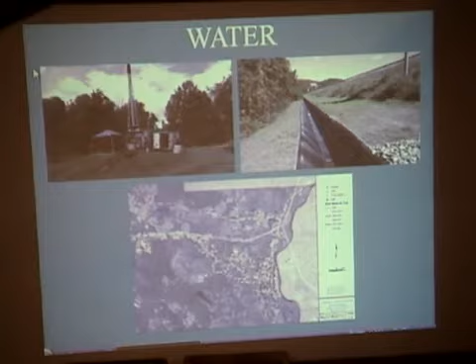Give you a background on Foster Street - everyone knows where Foster Street is. Right behind the Common Man, we have our well field. We have two gravel-packed wells at that location. One well is housed in the building in the top picture, and that's our primary well - it's been our workhorse for many years, the one we primarily use. Well number 2 is also a gravel-packed well out in the field area, represented by that hatch cover in the second picture.

That's the well currently getting reconditioned at this time, and we're also updating it to provide a more sanitary seal around it. The existing configuration was a shaft and turbine pump and motor that was not waterproof and flooded once before. So in this new configuration, we're going with a submersible pump and submersible motor - almost like just a normal homeowner's well with a pitless adapter coming out. It'll be totally sealed off from the elements, so we're hoping to get that up and running soon and back online.

We have a backup generator at this location that currently powers both wells in case of an emergency. It automatically comes on with a switch gear and can power those and take us through power outages.

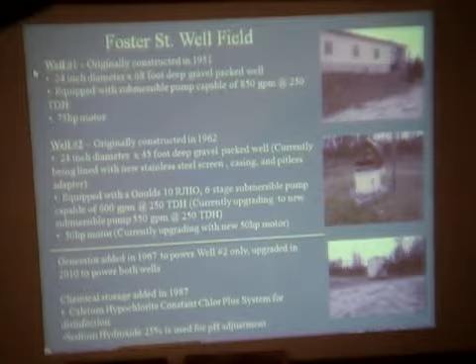We also have chemical storage on this site. We treat our water with calcium hypochlorite, which is used as a disinfectant for any coliform bacteria that may be present. We also use a sodium hydroxide solution for pH adjustment and corrosion control. Many of our pipes are iron - ductile iron, cast iron - and that's used to inhibit additional rust and dirty water and things of that nature that can result from water flowing through those type of pipes.

Next building is Reservoir Road Booster Pump Station, located up on Reservoir Road. You can't see this building from the road - you'll see the old booster pump station, which is a brick structure along the road, and this is out back a little ways down our access road. This was built in 2006, fairly new. It takes - so pretty much the two wells pump water throughout the distribution system and up to this location.

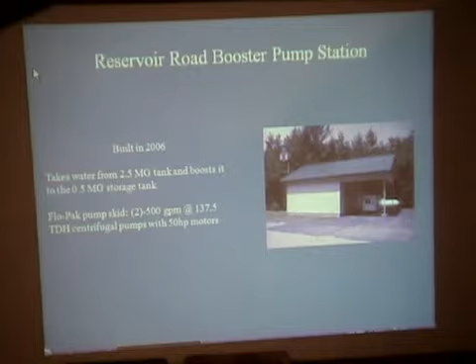And when the 2.5 million gallon tank, which you'll see coming up next, meets its demand, and the 500,000 gallon tank calls for demand, this booster station transfers water from tank to tank. So it boosts it up to the 500,000 gallon tank, which is a little farther up the road, and provides our high pressure system. So that's this building here.

This is our Boulder Point Drive booster station. You'll see it on Boulder Point Drive heading up towards Walmart on the right-hand side. This booster station draws water from our low pressure zone and boosts it only for the shopping centers and Walmart. This was needed back in 2002 when the development was being built there, to provide adequate pressure to those buildings and facilities. It also has one fire pump for those facilities, and that's an on-demand type pump.

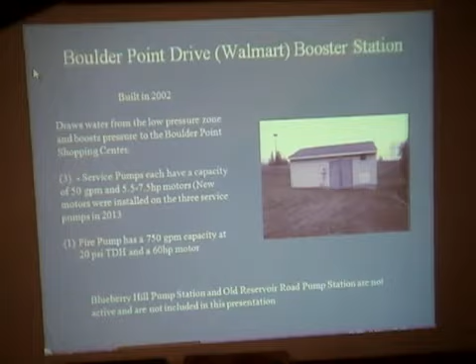I also noted we have 2 additional booster pump stations: one at Blueberry Hill condominium complex, and one at the old Reservoir Road booster pump station, and they're not active at this time. Old Reservoir Road pump station has been dismantled and is currently in disrepair, and it was not needed because of the new one that was built. The Blueberry Hill pump station was never put online because it was built for future expansion at that location. So at this time, that one's not active either.

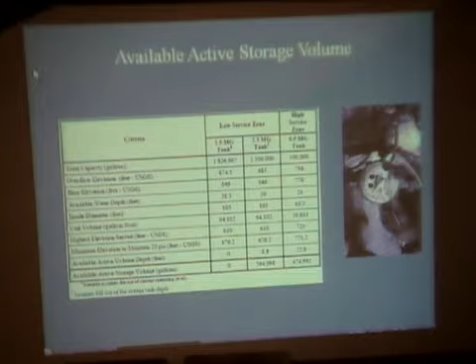Here's our available active storage volume. Most of this information you'll find in our water system master plan that was put out in 2014, which we provided to Sharon, and I don't know if anyone had seen that prior to this presentation. A lot of this information is found in there as well.

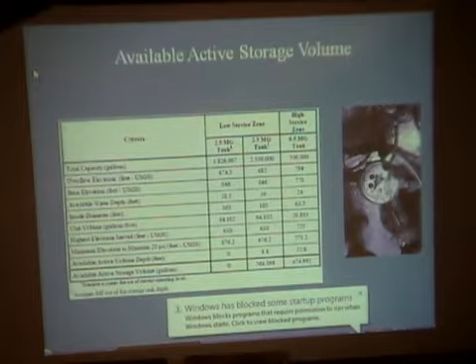You'll see our low service zone is supplied by the 2.5 million gallon tank, and our high service zone is supplied by our 500,000 gallon tank. You can see the capacities there, the elevations, and minimum elevations to 20 psi, which is required for fire flow, and our active storage.

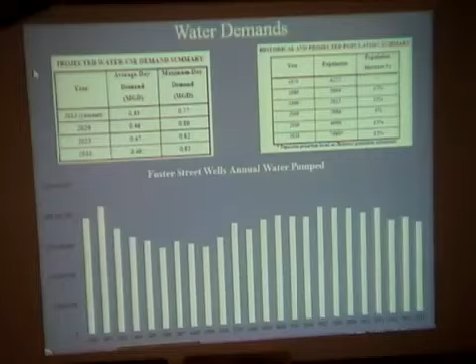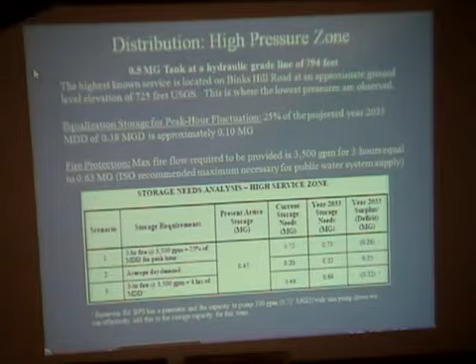Jason, there were a couple spots where you had the smallest diameter pipe - is there, and you said at some point that would have to be upgraded? Correct. Yep, we're assessing that currently, and it'll be in our future capital improvements plan. When do you anticipate, if we can handle up to 2033? Is there a way to tell when that might need to be done? Yeah, we're currently prioritizing that.

Those projections on flow are total projections, total demand throughout the entire system, what our wells pump - not specifically through those smaller diameter pipes. We'd have to do further flow assessments and monitoring on those to determine how much flow is going through each section of pipe. We don't have the metering capabilities right now to provide that data, but we can get an overall idea by isolating the roads or sections of pipe and taking readings from customers' meters along those stretches, adding that together to find the total flow and demand within those areas. That's something up and coming; we haven't done that at this time.

The 4-inch and below is a fire protection requirement, so they're requiring minimum 6-inch diameter pipe. This stuff was put in probably 10, 20, 30, 40 years ago, at a time when there was no requirement for that.

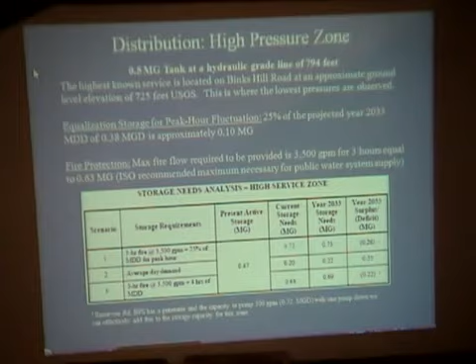Looking at the high pressure zone, this is the 500,000 gallon tank. We have a hydraulic grade line of 794 feet, with approximate ground elevation of 725. These are projections based on that 2033 year for storage needs, whether we're going to have a surplus or a deficit at that time.

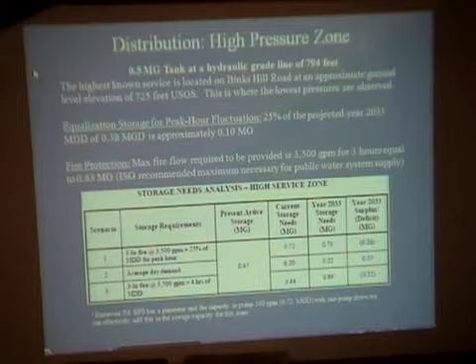Fire protection is taken into account in this table, and the maximum fire flow required is 3,500 gallons per minute for 3 hours, equal to 0.63 million gallons, which is an ISO recommended maximum for a public water system - independent insurance companies require that number.

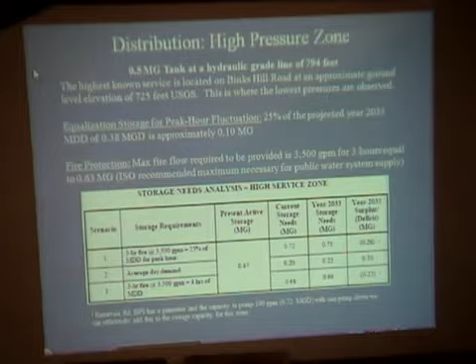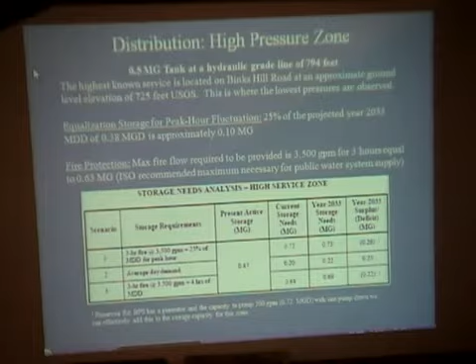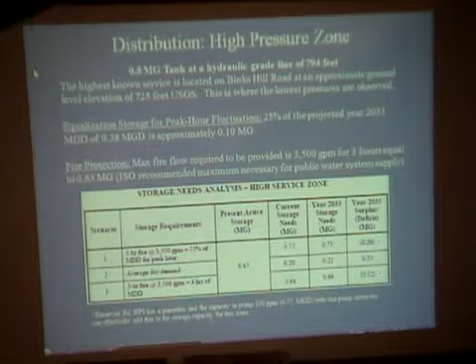We take the calculation of 25% of our maximum daily demand for peak hour and include that in scenario number 1. It shows our present active storage is 0.47 million gallons, and our current storage needs are 0.72, and 0.73 by 2033, which means we have a deficit of 260,000 gallons per day. That tank was put in knowing that the booster station at Reservoir Road has pumping capabilities and backup generator power in the event of an emergency to add additional capacity at 500 gallons per minute, which can pump up the storage capacity in that zone so we don't lose that 260,000 gallons - it has enough power and flow to overcome that deficit, and that's included in those calculations.

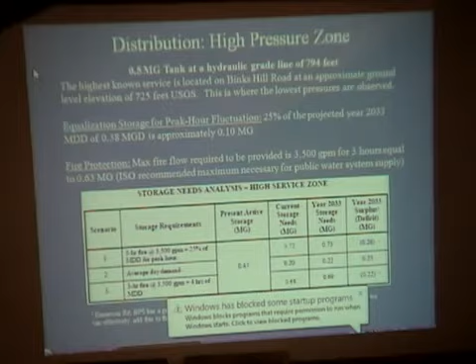Similar to the 500,000 gallon tank, it shows a deficit here by the year 2035 of 190,000 gallons a day.

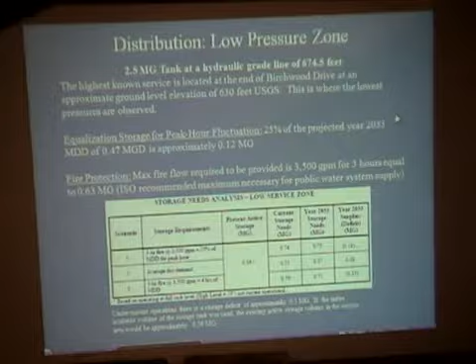That can be overcome by utilizing more of the tank. Under our current operations, we're only operating at a tank level of 27 feet, and the tank with the dome on it is 39 feet. Right now our overflow, when we pump into that tank, is at 28 feet elevation, which is sufficient for our current operation. But in the future, we will have the ability to add on to our overflow pipe and bring it up to a full capacity of 2.5 million.

That is the reason why it was constructed in that configuration, because of turnover. You don't want too much storage capacity, because then your water will be aged, and you'd have higher pressures as well. As you come up in elevation, we'd be having higher pressures sending it down in areas that don't really need the higher pressures. There's many folks that have pressure reducing valves at their homes and businesses to bring that pressure down. So there's a fine line of where you can bring the water up to and how much capacity we need.

That is also on demand from our 2 pumps down at Foster Street. So if there is a fire flow or an incident where it does draw the tank down significantly, we can produce up to 1,200 gallons per minute coming up to the tank if we need to.

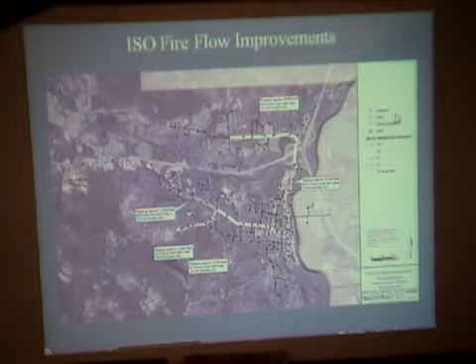Here's a list of our ISO fire flow improvements. These are recommendations coming from Wright Pierce based on our master plan. Many of these are either diameter constraints where the pipe was too small and they're upgrading to larger diameter, or there was a hydraulic deficiency in that area, hence you'd have to have a larger diameter to increase flow.

We also have a map of traffic interruption risks. They ran models on traffic and provided us with some of the high major interruption areas, which you see in red there, which would be all of our main roads: Highland Street, Main Street, Route 3 North, going on to the Holderness side.

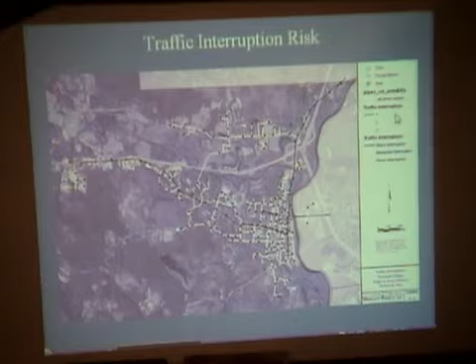Here's a list of our short-term improvements. These are improvements that were recommended to us, and they're not in any distinct order at this time. We've been working on a few of these already. New source water investigations - we've been investigating an alternative well site over on Holderness School property to bring additional source water into our system.

We have done 500,000 gallon and 2.5 million gallon storage tank inspections this past summer. Both of those tanks are in good shape. There were recommendations for some cathodic protection for corrosion control in those facilities.

We're in the progress of doing Foster Street well inspection and cleaning. As a result of the inspection on our well number 2 there, like I mentioned, they found deficiencies, and that's why we're upgrading. We're taking the action to upgrade that and recondition it.

We are looking into SCADA improvements. SCADA is Supervisory Control and Data Acquisition - pretty much a computer program that we're able to remotely monitor our system at different locations. We have systems set up at Foster Street to monitor pH, chlorine and flow, and those 3 parameters are hooked up into alarm systems. So if they go out of their set points, we get alarmed and notified to be called in. That's pretty much what SCADA allows us to do, is remotely monitor our system after hours and from a central location at the treatment plant.

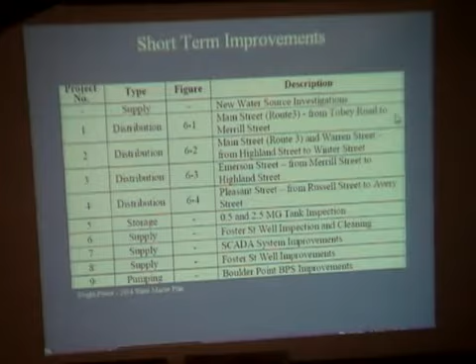Sure. Well, so that number 9 there, whatever the previous slide, you were doing like Boulder Point. Now, does Boulder Point, are you anticipating capacity for like the Soldier On thing and possibly more future development? Right, that's something that needs to be accounted for in that.

And boosters, pump station improvements there. Like I said, we're mostly telemetry items. That's our only pump station currently that has a radio frequency that actually relays to pump station 4, a sewer pump station, which goes dial-up back to the plant. So it's an antiquated setup there, and there's a lot of improvements that would go in that direction. But for pumping improvements...

That would be something required for a project like Soldier On in order to boost pressure up multi-levels. This pump station was designed based on the current elevations of the facilities there, so anything higher and above and beyond that would need extra boosting capability.

If I may, the planning department, which is me, we do certainly reach out to water and sewer and include them under the department head report information for major projects, or any project really that's going to entail a lot of new infrastructure or connectivity on their part. So we're getting that initial feedback, and it's mostly important to keep them in the loop so they can help anticipate, because, you know, all of your work, and no pun intended, is fluid, and ours is too, so we're trying to keep each other apprised of things so we don't paint ourselves into any corners.

We'll go into our sewer side of things. This is our wastewater treatment plant. Average daily flows are similar to what water is - pretty much what goes in must come out. We're pretty close to about 450,000 gallons a day, 0.45 MGD.

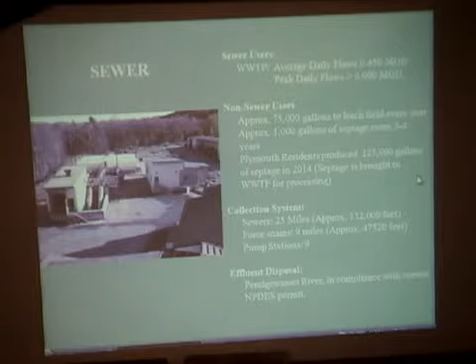We do see peak flows in excess of 3 million gallons a day, specifically during times of heavy rains and when colleges are in town. We have a significant amount of what they call I&I, inflow and infiltration - that's stormwater coming into our sewer system through manholes or other areas that are broken pipe or old storm drainage systems still connected possibly to our sewer system.

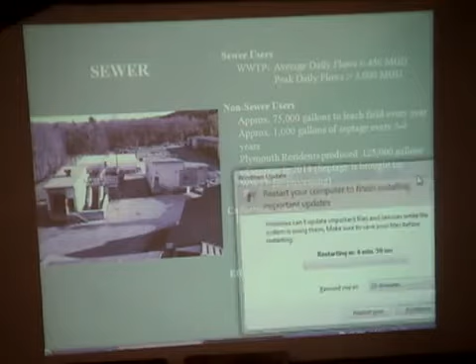There was a mass separation project, I believe in the early 90s, that they did in the downtown area to try to separate a lot of that infrastructure out. But there's still a few, maybe less than a dozen now that we know of, tied-in storm drains that we're looking to separate as well. The South Main Street project would address some of those, maybe half of them almost.

So that is a significant intake of water. Non-sewer users, if you live on a private septic system, approximate about 75,000 gallons a year to a leach field and about 1,000 gallons of septage every 3 to 4 years. In the past year, 2014, Plymouth residents produced 125,000 gallons of septage - dividing that by 1,000 gallons, about 125 residents had their septage tanks pumped out, which is pretty average for a town of this size.

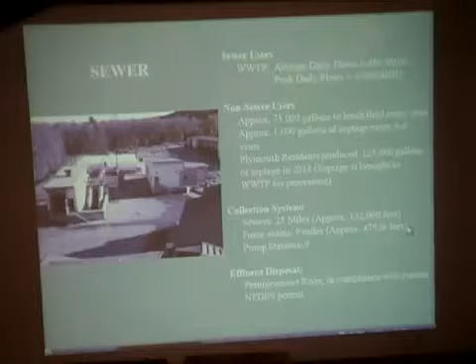And it shows that it's promoting people taking care and maintaining their systems. Our collection system has about 25 miles of gravity mains and 9 miles of force mains, and we have 9 pump stations throughout. Our effluent disposal is to the Pemigewasset River in compliance with our current permit.

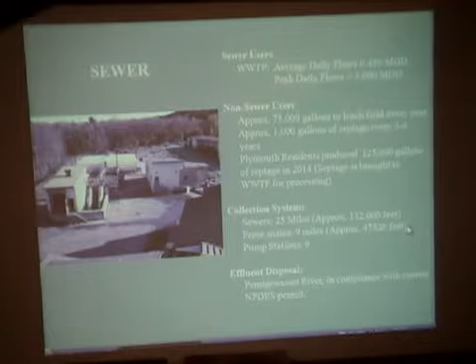Here's an overlay of our wastewater treatment plant. Pretty much from left to right is where the water comes in on the left-hand side. Preliminary treatment is at our headworks building, which removes debris, sticks, floatables, and grit, which cause problems with equipment. Then it goes to our primary settling tanks, which removes 50% of the particulate materials - anything that doesn't float or sink goes through there, taking out floatables and sinkables in that section.

Then it goes into our secondary treatment, which is our rotating biological contactors, and this removes greater than 90% of the organic materials and some nutrients. Over the last couple of years we've been averaging 98% removal of organics, whether it's total suspended solids or biochemical oxygen demand. We've had great removal - our permit requires a minimum of 85% removal, so we've been doing great in that respect.

Then it goes to our secondary clarifiers. Anything that gets passed through the RBC system, rotating biological contactors, has bugs living on fixed media, and those bugs eat the organics. When they die, they fall off into the water and go to our secondary settling tanks to settle out. That secondary sludge gets pumped back up to a gravity thickener, which allows for additional settling before it's dewatered, and we send out our biosolids to be land applied.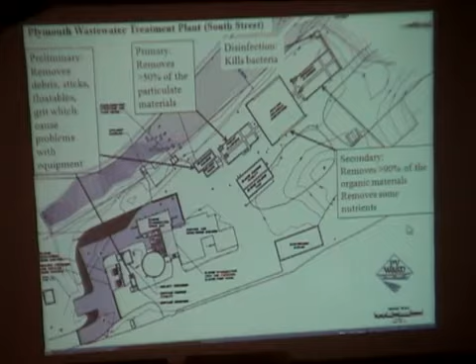So all the solids are land applied on local farms after that, and then the water goes out past our secondary clarifiers, where you see disinfection kill bacteria. Pretty much from that point all the way up to the next box on your left, closest to the river, the small box there, we have chlorine contact tubes underground that allow us enough contact time to kill the bacteria, and then we dechlorinate at our outfall before it goes to the river. So essentially, when it goes to the river, we have a chlorine residual of 0. That's pretty much how the treatment process works there.

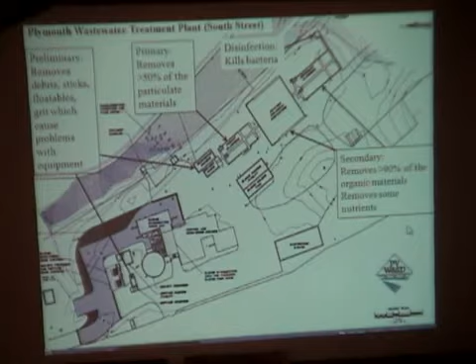We also take in the septage. The septage comes in almost directly to that gravity thickener and gets dewatered. So a lot of that is highly concentrated waste that we don't run through our entire system.

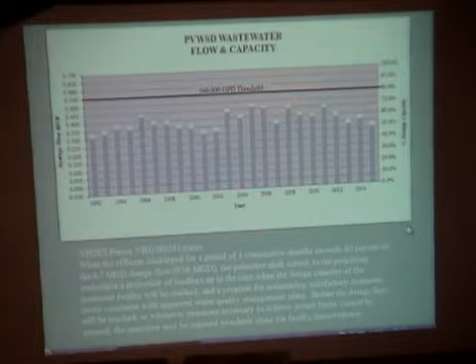So here's our flow and capacity. DES and our NPDES permit requires that effluent discharge be below 80% of our design capacity. Our design capacity at our treatment plant is 0.7 million gallons a day, or 700,000 gallons. So we have to maintain our flows below that 80% threshold for 3 consecutive months at least. If we are beyond that point for 3 consecutive months, DES is going to come in and ask us to implement a plan to either upgrade our system or find out how to eliminate flows. So either one.

It's very difficult to delineate and eliminate flows, you can't just shut people's sewer off. So at that point, we'll have to do an additional upgrade to meet that requirement.

But as of right now, you can see it's pretty flat, similar to water. We've had some up and down years elevated here in the last 10 years. It seems like there isn't a specific trend up or down. But the past year, 2014, we ran about 55% capacity. So there is quite a significant availability, another 25-30% before we do hit that threshold.

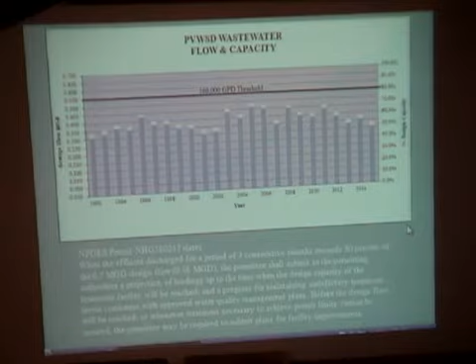So as the treatment plant, we do have that hydraulic capacity, and then there's also the loading capacity of our chemicals and of our total suspended solids and our biochemical oxygen demand that also come into play. So we can't look at this separately from that. Those two loadings, hydraulic and loading, have to be meshed together and taken into account for that 80%.

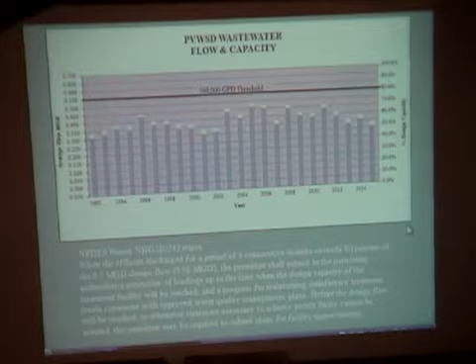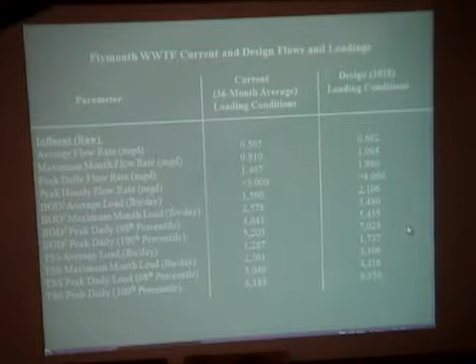You can see these are a bunch of our 36-month average and then our design 2028 loading conditions for raw influent. As you can see, there is anticipation of increases, and we're able to at this time handle all that through 2028.

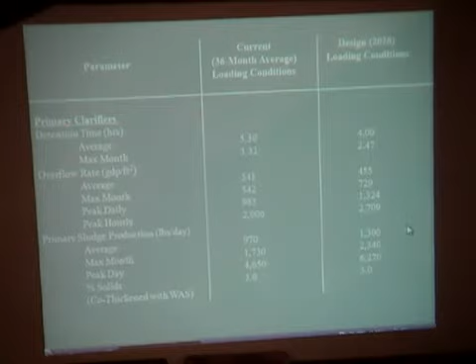So I won't go through all this step by step, but we also have information for our primary clarifiers. Pretty much each piece of equipment gets monitored on a, if not a daily, a weekly, or a monthly basis. So we report all this data that we take every month to the EPA and DES, so they can also monitor what we're doing. So they're right on top of what goes in and out each month. It's not like it's an end of the year report that they're just getting. They're on top of you.

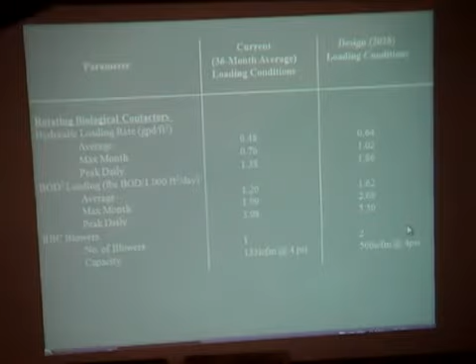Here's our rotating biological contactors. Interesting piece of information here. We have about 1,300,000 square feet of media in our biological contactors. So if you think of that on a grand scale, it's quite a bit of surface area that we're treating this water at.

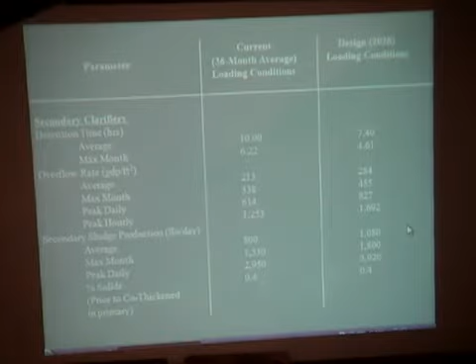Secondary clarifiers, again, goes through all of our overflow rates and detention times. It gives you an estimate of how long actually it's taking to go through each process at the plant as well. So it'll give you, based on flow conditions, a detention time and how many hours we're actually getting contact with each specific area throughout the plant.

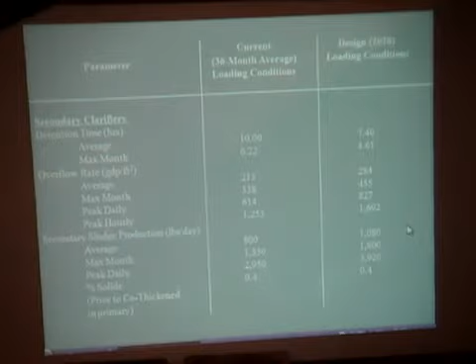Jason, a quick question. Sure. So the design loading conditions for 2018, that's what you anticipate? Correct. And what's the capacity of the system itself? You showed that on the previous slide for the hydrology, but not for these, is that correct? For the design capacity of these? Yeah. We have other information in our operations and maintenance manual that we can provide to you if you like that. I was just curious. Yep. Okay. Yep.

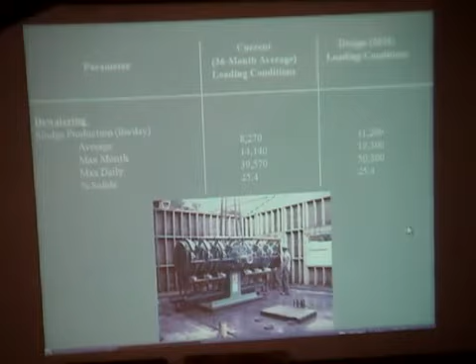Here's our dewatering. This shows how much sludge production a day we're anticipating, and we get about 25% solids when it all comes down to it at the end of the day, once it goes into the trailer to get taken off to the farms. Right here is what they call a Fournier screw press. It actually takes the sludge like a pancake and squeezes the water right out of it, then sends the solids up a conveyor.

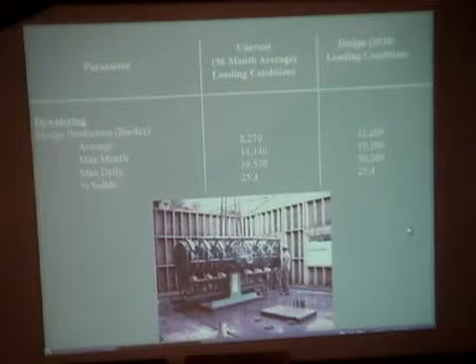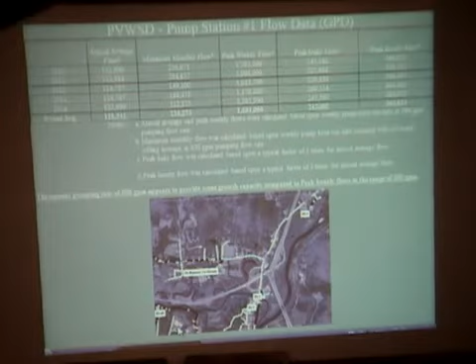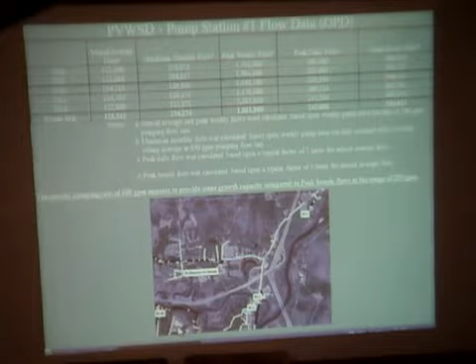So, like I said, we have 9 pump stations scattered throughout the service area. Pump station 1, as you can see on the map below, is directly across the street from our office on Old North Main Street. That pump station gets sewage flow all the way from Fairgrounds Road, Route 3 North area, everything coming down from that area goes into this pump station, and then gets pumped up to Green Street and goes gravity to the sewer plant from there.

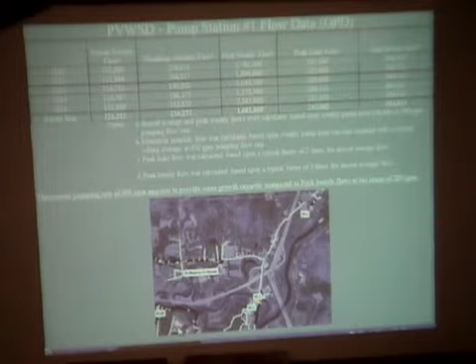This pump station has a pumping rate of 500 gallons per minute, and based on a 5-year peak hourly flow in the range of 250 gallons per minute, this pump station is about a little more than half capacity. It would possibly need an upgrade in the next 5 to 10 years, contingent upon further development of our force main from pump station 4 as well.

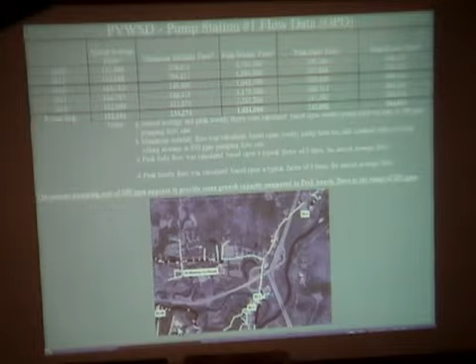We're currently working on a 4,000 foot section off of Tenney Mountain Highway adjacent to the Baker River, which goes cross country. We're replacing that currently because that section of pipe had 7 breaks within the last 2.5 years, so that was a high priority replacement. That replacement pretty much ends at the toe of the slope before the high school baseball field, looking off towards the Baker River. The remainder of that pipe, I'll talk about later when we go to pump station 4, goes up through the ball fields to Emerson and Highland Street.

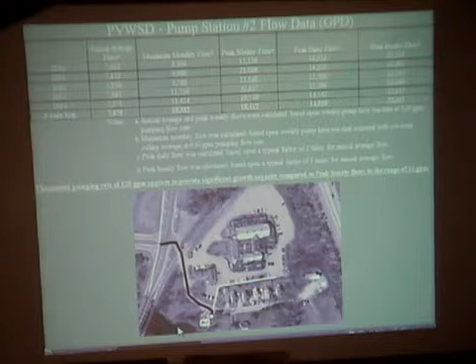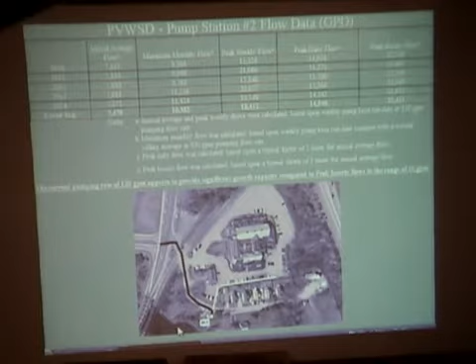Pump station 2 is right outside of the rent-a-car place and the Common Man, on Foster Street. It's a small pump station, and it is in disrepair—we're currently investigating the replacement of pumps there. But this pump station takes a very minimal amount of flow. You can see an average peak hourly flow of 15 gallons per minute, with an ability to pump 120 gallons per minute. This primarily takes flow from the Common Man, the few residences along Foster Street, and the rental shop there, and pumps flow out to Route 3, which goes gravity to pump station 1.

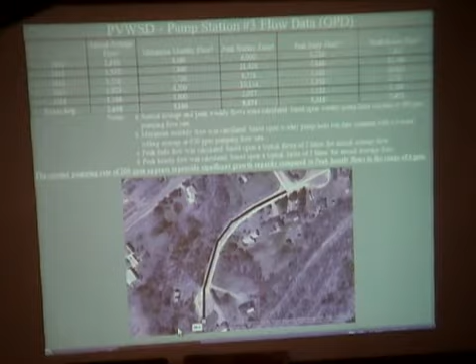Pump station 3 is another small pump station, with a peak hourly flow of 6 gallons per minute. This pump station was put in on Pemmy Drive, at the end of the cul-de-sac, and takes flow just from residents within that subdivision. It pumps flow up to Route 3, and then it's gravity from there.

Pump station 4 is one of our largest pump stations other than pump station 1. This pump station sees flow in the range of 100 gallons per minute, and has pumps capable of 650 gallons per minute. It was put in response to development on Tenney Mountain back in the late 80s. Pump stations 4 and 5, the next one, were both put in during that infrastructure upgrade.

The force main on this one, as you can see, is the dark line—it goes all along the river, comes up in the corner of the ball field, goes across the edge of the football field, and comes out on Merrill Extension, then makes a right up Emerson Street before it goes gravity on Highland down to the treatment plant. So this is quite a long force main, with a lot of head pressure.

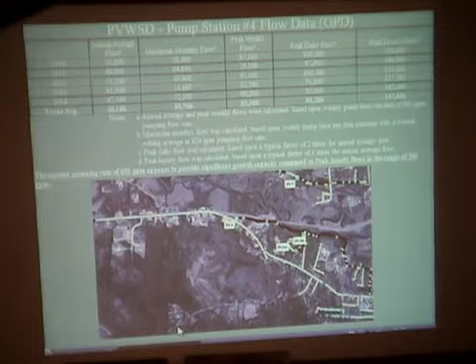The 7 breaks I mentioned earlier were primarily due to transient head pressure coming back throughout the system when the check valve at the pump station closed. It's pumping at about 60 to 80 psi, and when the check valve closes with all that head pressure coming back, it can be in excess of 180 to 200 psi, and it just blew the line out. It was class 51 unlined ductile iron.

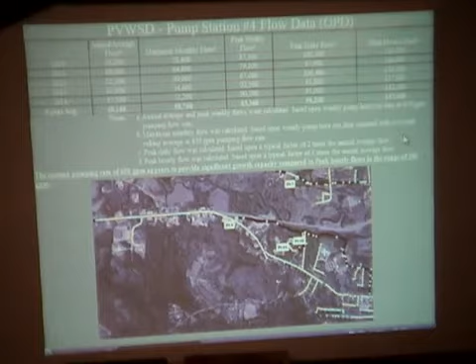That was another issue with this section of force main—it wasn't seeing flows, maybe about 20% of the actual capacity this pump station can take right now, because it was built with the anticipation of the build out on Tenney Mountain. We have an agreement with Tenney Mountain Condo Association for 100,000 gallons a day, and you'll see in a later slide on their flows, it is not anywhere near that. So low flow means long retention time, and long retention time in a force main means sewage goes septic. When sewage goes septic, it's highly corrosive. So between the corrosiveness of the sewage and the pressure coming back, it blew the line out.

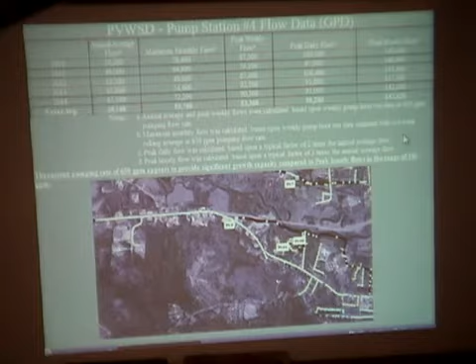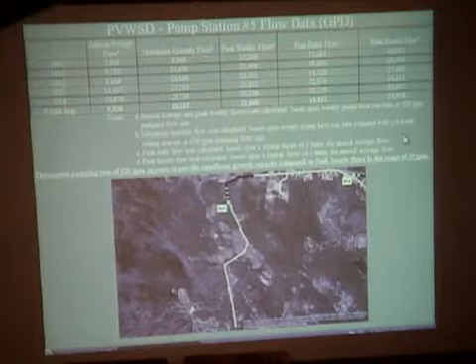Here's pump station number 5, out on Yetton Road. This pump station, like I said, was built in response to Tenney Mountain. As you can see at the end of the line at the bottom of the screen, that's where our system starts and Tenney Mountain's system ends. Anything beyond that is owned and operated by Tenney Mountain Condo Association and is their responsibility to maintain. So it's gravity all the way down Yetton Road to our pump station, and then from there it has a little bit of a lift up to Tenney Mountain Highway, and then it's gravity from there down to pump station 4.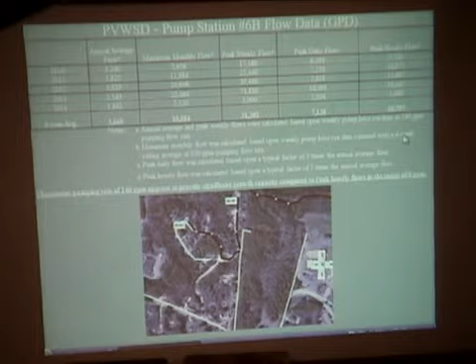So this was what I was talking about on our pump station 4 force main. Our next phase of replacement is potentially evaluating going up to the ball fields and then going gravity to pump station 1, instead of going all the way up Emerson Street to Highland before it goes gravity. This would relieve some of those pressures from that section of line, but would also mean upgrading pump station 1 further to handle that capacity.

Here's pump station 7, out on Fairgrounds Road. As you can see, it's just past Cooksville, almost across from the old fairgrounds, down in the hollow there. This is where we did a project this summer of about 370 feet of force main from pump station 7 up to about Pemi Commons, the top of the hill there. We did the force main, the gravity sewer, and the water in that section, primarily due to settling in the roadway.

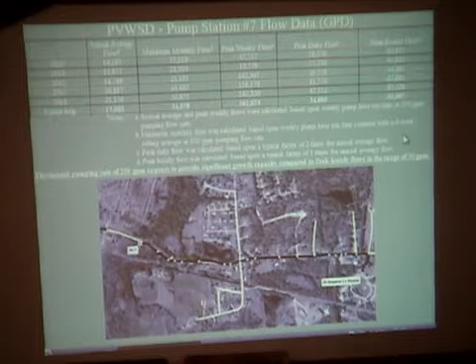This pump station sees a flow in the range of 35 gallons per minute with a pumping rate of 250. This pump station pumps all the way back up Fairgrounds Road, just across from Morgan Drive, and goes gravity from there down to Route 3 and then down to pump station 1.

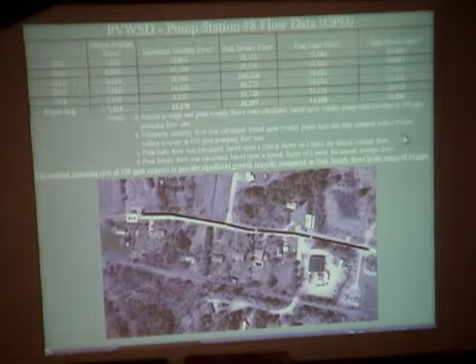And then pump station 8, our last pump station, is about halfway down Fairgrounds Road, right by the church there. You'll see a stockade fence in front of - I'm not sure if it's the Methodist church, there's two churches out there - but our pump station is directly in front behind the stockade fence. It gets a short stretch of this portion of Fairgrounds Road that comes back to it, and then pumps up to pump station 7, which takes it from there. This is the end of our sewer line on Fairgrounds Road, as well as our water line. We go no further west on Fairgrounds Road than this.

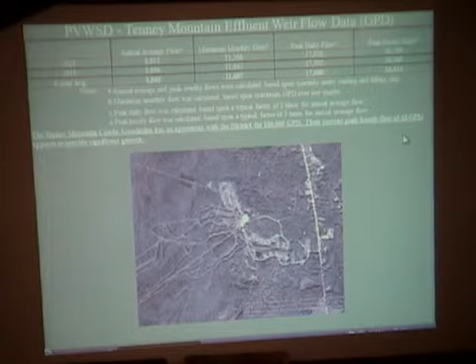Here is Tenney Mountain effluent weir flow data. All the roads and condos in Tenney Mountain Condo Association come through with this effluent weir before it goes into our system. We don't provide them water, so we don't meter them for water, but this is how we meter them for sewer in order to charge them the fair amount.

As I understand it, there are additional condo associations on Tenney Mountain that aren't connected at this time, so that's possible future expansion. We have an agreement with the Tenney Mountain Condo Association for 100,000 gallons, and they're only pumping on average about 8,800 gallons a day, so there's a ton of capacity there for future - possibly getting other condo associations to tie in.

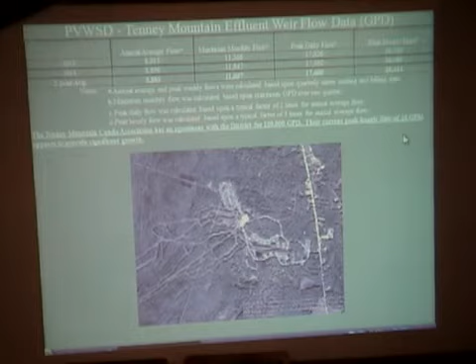Does it help at all anywhere on Tenney Mountain Highway to add to the capacity? Or does it really only matter at that spot?

No, this was designed pretty much around pump station 5, on Yetton Road, and pump station 4, fed from 5 - both designed in conjunction with Tenney Mountain back in the late 80s when they were anticipating that 100,000 gallons a day, which we agreed to. So there's plenty of capacity there for their future build out if possible.

Well, I was asking about Tenney Mountain Highway - is any further development on Tenney Mountain Highway going to help with the capacity problem, the lack of capacity you're talking about? But there isn't a lack of capacity, there's plenty of capacity. Plenty of capacity, I mean, the lack of effluent going into would...

Right, it would help. Yep, that's what I wanted. And we're designed to take that.

Engineers, when they were designing this force main previously to this year, were looking at going to smaller pipes, which would increase velocity and flow over time. But we steered them in the other direction to keep it at the same size pipe existing, because we do have that agreement in place. So at this point, we're just anticipating possible build out on Tenney Mountain Highway, and there is capacity there for that at this time.

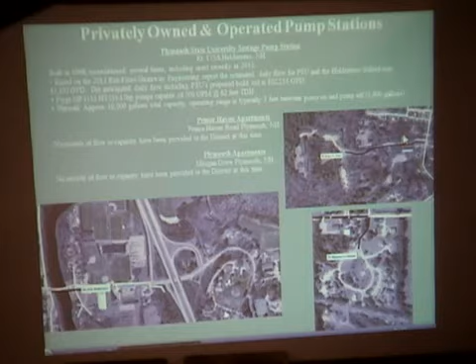Prince Haven Apartments is another pump station that's privately owned and maintained, as well as Plymouth Apartments on Morgan Drive. That's another pump station that's privately owned and maintained, and we are currently in the process of garnering records from them in order to include in our reports and our anticipations and capacity evaluations for their infrastructure.

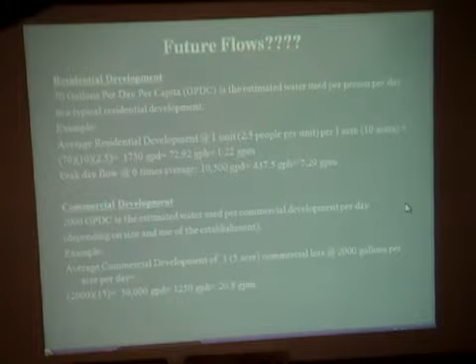So, future flows. This is just a general overview of residential versus commercial development. What kind of values do you put on a residential development? How much flow is anticipated per person, per house, per subdivision? This is just some of the basic math that can be done when you're looking at things of that nature.

In general, there's an average of about 70 gallons per day per capita. That's a general number that some engineers use. And then I just put an example of the development, how to do the math, how to anticipate how many gallons per day, gallons per hour, gallons per minute would be the average for that type of build out, as well as peak day flow at six times the average.

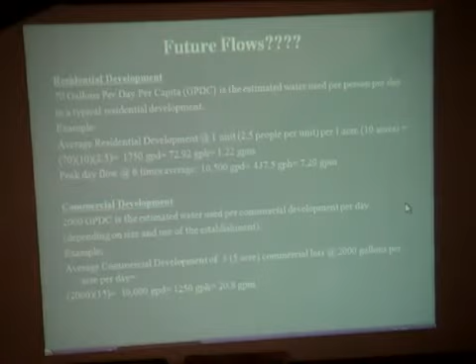And then same thing with a commercial development. Typical commercial development is about 2,000 gallons per day per capita, based on one commercial unit. But that's highly going to vary depending on the type of establishment. Obviously, a restaurant is going to be different than an auto parts store, so that's going to be taken loosely on that value. But it gives you an example of average commercial development of 3 commercial lots, say 5-acre lots, at 2,000 gallons per acre per day. That gives you the estimated flow for those locations.

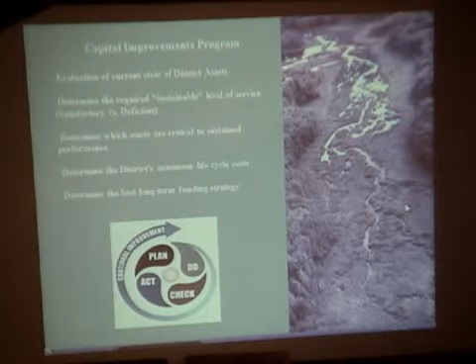And then capital improvements program, like I mentioned earlier in the beginning of the presentation, we're currently evaluating the state of the district's assets. Like Marilise mentioned, I've only been here for about a year at this point - 1 year yesterday, 2 days ago, yeah.

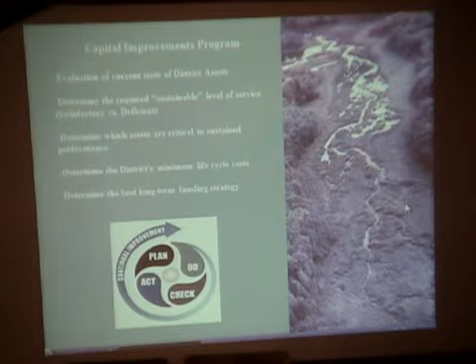So it's - I love it. It's been a great place to work, and the guys are great, and the facilities do need some work, and there needs to be some good planning down the road. But I think this town can do real well on their future sewer and water infrastructure.

So we want to determine the required sustainable level of service for our residents. What is the definition of sustainable in a water and sewer environment? It really highly depends. You could get a ton of build out, or you could get no build out. There's really no way to anticipate that other than doing population studies.

But we want to be able to maintain at least what we have, or a better level of service, in order to keep everyone that is currently on sewer up and running and flowing. We don't want things to break down to the point where we're not able to provide the services that we do anymore, which would be a detriment to the community. So we want to keep those sustainable. We want to determine which assets are critical to sustain performance. Again, that goes right along the same lines.

In our master plan, we have engineers that laid out what infrastructure is high risk, the smaller diameter stuff, hydraulic deficiencies, things of that nature, which are critical. We will prioritize those as we move forward within the next few years.

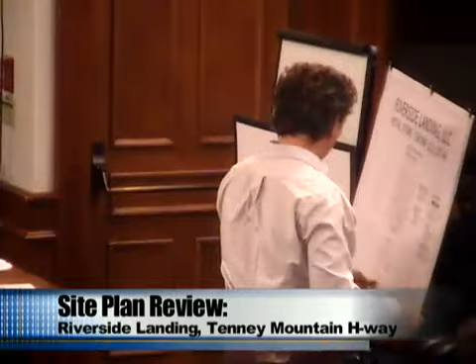This is an overview plan of the whole property, sheet 201. So this is the McDonald's and the bank, the proposed hotel site, and then this is the retail store that we're discussing now. I guess I'd like to step back and step through briefly the permitting process to reiterate the pad development that was discussed last time. So originally when this development was planned, there was a large pad area which encompassed all of the current development as well as this outline that you see out to here.

When the design engineer did that and permitted it, as part of the permitting they provided an infiltration basin for the pad. What's happened as the developments have taken place, each site has been done sort of in a vacuum, and they have provided the stormwater treatment, detention, and everything required for the state as they move forward. And so the pad itself has not been created past this point.

So it's still permitted, and that's why we've carried it through. If the developer chooses to build the pad before another project is in place, they would need to build the infiltration basin. So currently, it's a grassed meadow, and as they build the pad, they either have to, like this project is proposing, provide most likely an underground chamber system to detain and infiltrate runoff for that particular project, or they'll build the full pad and then do the infiltration basin and await the next development pod.

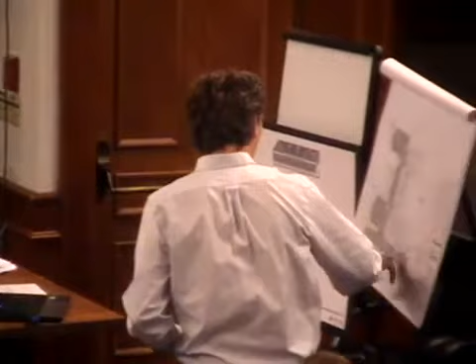The second item was a question on the lot coverage for the hotel site, in reference to the sidewalk and road widening proposed by this project. There was a question about increasing impervious area, since the property line for the hotel site comes roughly to the center line of this road. We did look at the numbers, and I have them in the letter here. The new lot coverage is 58%, so we're under the 75% limit for that property.

There was a detailed letter with several attachments provided from the traffic engineer, Steve Pernaw. The result of that was that there would be no significant increase to the intersection, and he didn't feel anything needed to be done to that design at this time.

I failed to mention in the letter that we did add some landscaping as requested. On the north side of the parking lot, there's been added a row of plants. We also modified some of the landscaping proposed at the hotel entrance because that entrance island is getting a little bit smaller as a result of the intersection design.

I think that addresses the questions, so I'm happy to take any additional questions at this point.